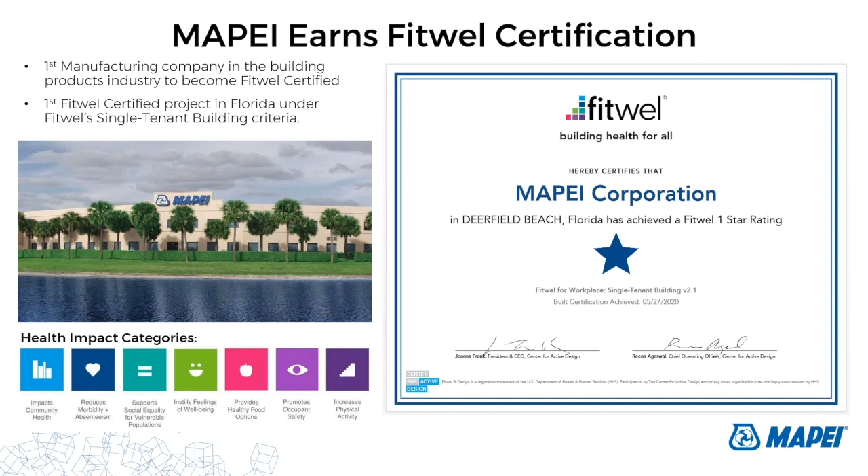MAPEI takes pride in being a leader in the industries we compete in. To continue to be a leader, we need to ensure that we understand the latest industry trends and keep our knowledge base current. We have LEED accredited professionals, or LEED APs, and WELL APs. Recently, a few members of the sustainability team completed a Healthier Materials and Sustainable Buildings course at Parsons School of Design, and we also have LEED and WELL faculty members on our sustainability team. Faculty members have to prove that they're credible, qualified instructors with deep sustainability expertise, so we get to present more technical information on LEED and WELL.

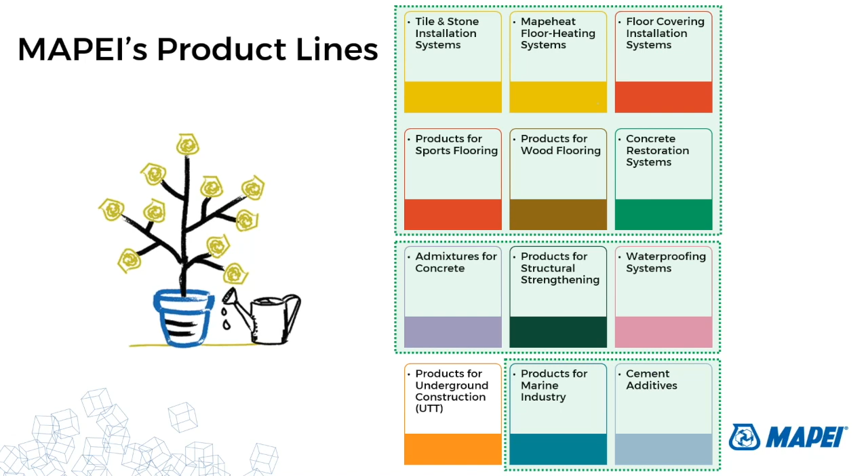The construction industry has a significant impact on the environment. The industry accounts for roughly 25 to 40% of the world's total carbon emissions. Mining projects extract minerals needed for construction materials. Companies then transport these materials to different parts of the world. And so both of these processes burn up fossil fuels, and the combustion of fossil fuels produces greenhouse gases.

One of the biggest environmental problems related to infrastructure development is energy use, and the global building sector consumes about 36% of the world's energy. So we need to act as an industry in watching what we're depleting in naturally needed resources. So we need to watch and be more careful in how we manufacture.

Other studies show that construction is responsible for 50% of landfill waste, as well as water, air, and noise pollution, as well as destruction of natural habitats.

As the effects of climate change and other environmental issues become more pronounced, it's more important than ever to find ways to protect the environment. Fortunately for the construction industry, the same changes will protect the environment from harmful impacts of construction and also improve the quality of construction products and boost profits.

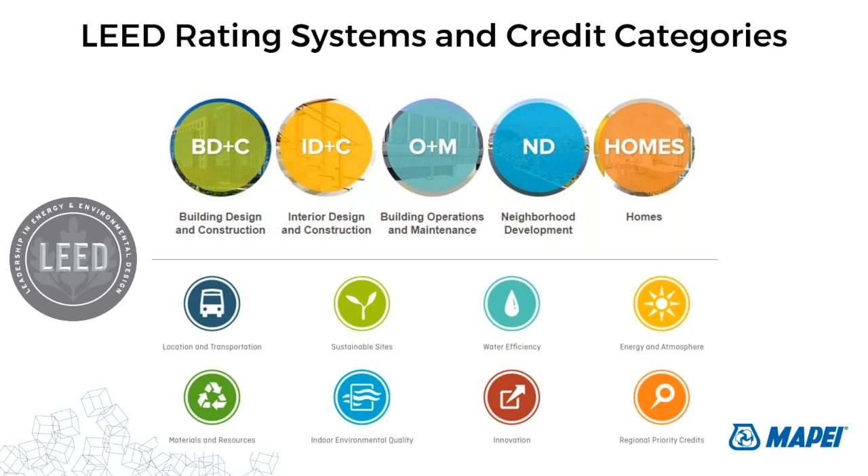There are currently 3 active versions of LEED. LEED versions 1 through 3 focused on using building products or materials with recycled content, low VOC content, and local sourcing. The newer versions, version 4 (V4) and version 4.1 (V4.1), focus on using products with environmental product declarations, health product declarations, and more stringent VOC emission requirements.

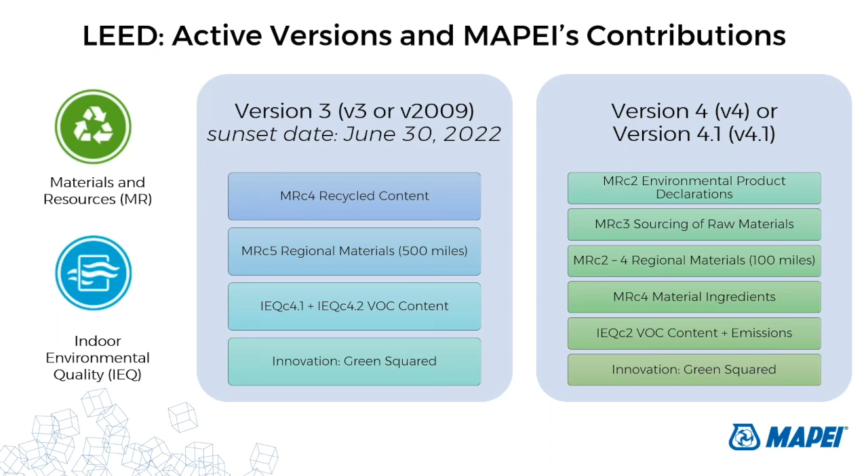ParkSmart. If you're not familiar with ParkSmart, LEED does not certify parking garages. If they're in your project scope, they're excluded from most credit categories. However, LEED came up with a rating system called ParkSmart, specific to the certification of parking garages.

Transportation in the US now emits more greenhouse gases than power plants. Worldwide, the number of motorized vehicles is expected to double by 2030, so enter ParkSmart. It's the world's only certification system designed to advance sustainable mobility through smarter parking structures, designs, and operations.

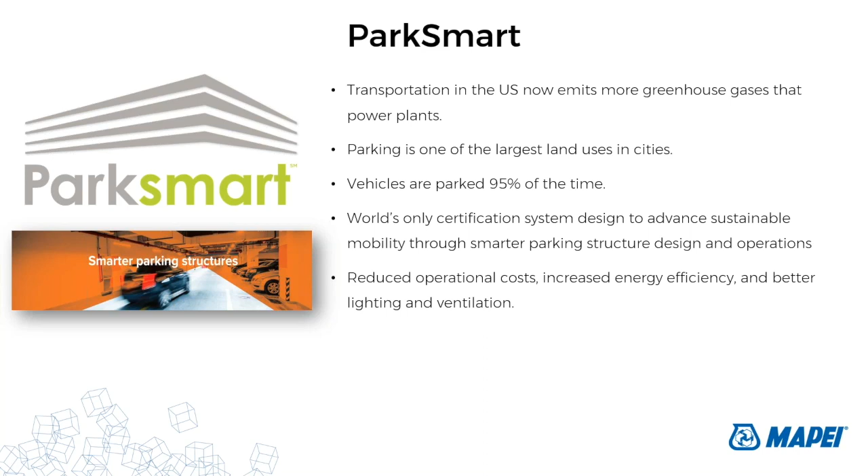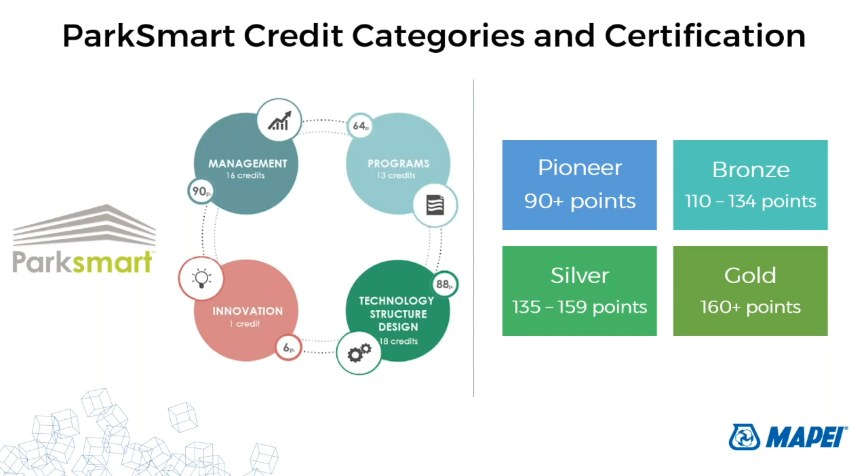MAPEI contributes to one of ParkSmart's credits, Measure C3. Instead of credit, they call it Measure C3, which is no or low VOC coatings, paints, and sealants. This ensures all paints, coatings, and sealants applied in the parking structure have little to no VOCs.

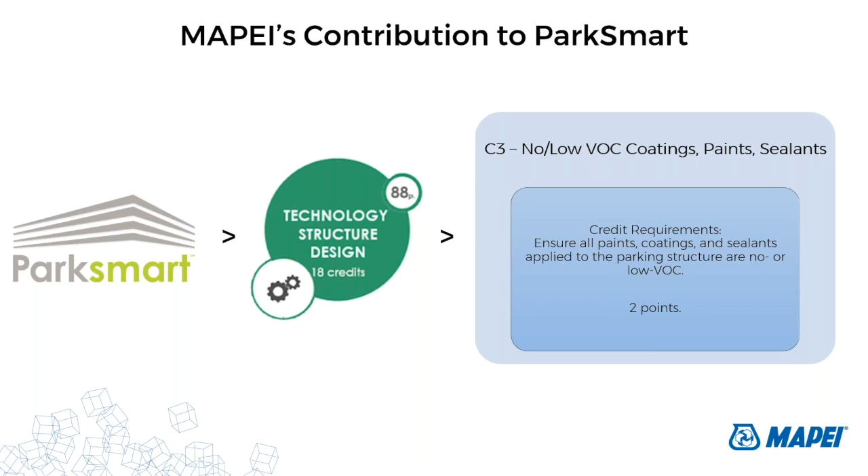Next, we'll talk about the Well Building Standard. If you're not familiar, it's the first of its kind - the first rating system to focus on the occupants of a space. It's developed by Delos and administered by the International Well Building Institute, or IWBI. It's also certified by the same certifying body as LEED.

So I always explain Well as picking up where LEED leaves off. LEED will look at a kitchen sink, for instance, and want to know how many gallons per minute that faucet is, how much water is coming out. Well looks at that same faucet and asks, what's the water quality? How is it going to impact human consumption? There are certain parameters that the project team has to meet. So they work together, LEED and Well.

Also, Well has a health safety rating. In response to COVID, the International Well Building Institute launched the Health Safety Rating System. It's a mouthful.

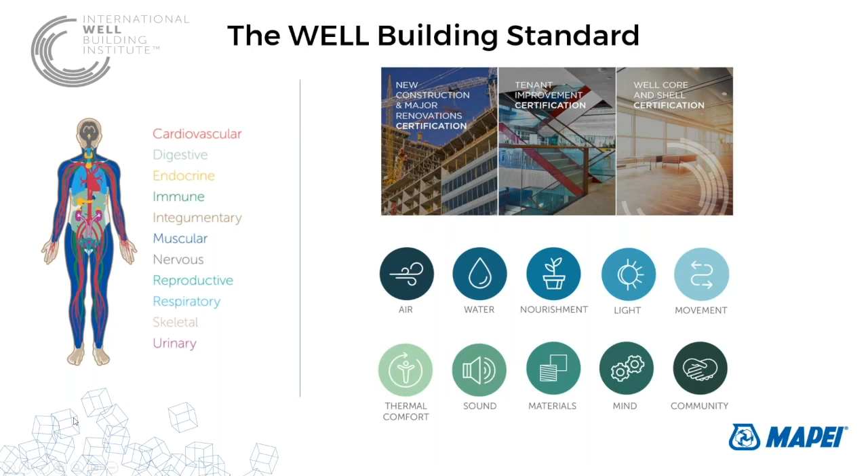Similar to LEED, the more points achieved, the higher the certification level. There are currently 2 active versions of Well. Currently, I don't believe there's any sunset date for Well version 1, unless it's come out recently and I haven't heard. Version 2 now includes the materials concept, which further adds to version 1, and now includes VOC and material transparency requirements that we'll talk about today.

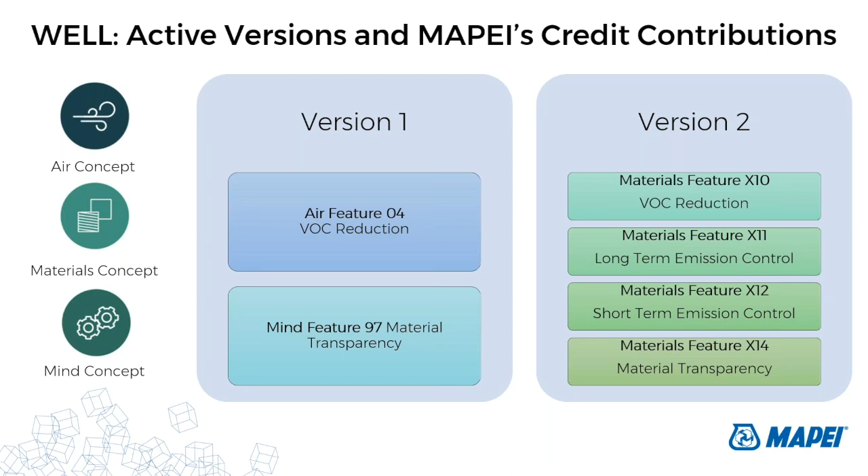The International Living Future Institute, or ILFI, is a nonprofit working to build an ecological-minded, restorative world for all people. Using principles of social and environmental justice, ILFI seeks to counter climate change by pushing for urban environments free of fossil fuels. ILFI runs the Living Building Challenge, the most rigorous green building standard, not to mention several other programs like the Living Product Challenge, the Living Community Challenge, and the Reveal, Declare, and Just labels.

These programs develop a green framework for living in a 21st century world. The Living Community Challenge creates a new era for community building and a new version of urban design. It's a certification that scales up innovations made by Living Building and Living Product Challenge products, and envisions cities and regions as living entities.

There are other programs like Core Green Building Certification, a framework that outlines 10 practices that a building must achieve in order to be considered sustainable. The Declare label we'll talk about a little later, and Just, which like Declare, is a transparency platform and disclosure tool. Just allows organizations the opportunity to publicly document and quantify their commitment to social equity in the workplace.

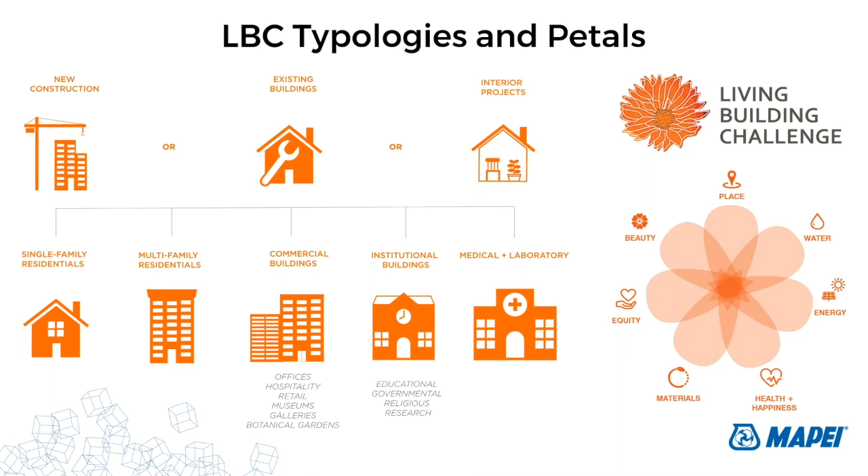There are 4 typologies: new building, existing building, interior, and landscape or infrastructure, which is not shown here. Living Building Challenge consists of 7 performance categories or petals: place, water, energy, health and happiness, materials, equity, and beauty.

So based on the petals pursued and their requirements, project teams can achieve various Living Future certifications. Living Building Challenge, or LBC, is the most difficult, or the most rigorous standard for green buildings. I refer to LBC, or Living Building Challenge, as LEED on steroids. It goes above and beyond LEED certification, as Living Building also strives for net zero or net positive energy.

They also request freedom from toxic chemicals and lower energy footprints than a typical structure. LEED is catching up to the requirements asked of Living Building Challenge. There's a lot of similarities between the two, so the idea of LBC being LEED on steroids is quickly going away.

Living Building Challenge is not a competition. It takes its name from its level of rigor and does not include any sort of contest, even though it's called a challenge. To be certified under Living Building Challenge, projects must meet a series of ambitious performance requirements over a minimum of 12 months of continuous occupancy. There are several types of certification, like core green building certification, petal certification, zero energy, and zero carbon certifications.

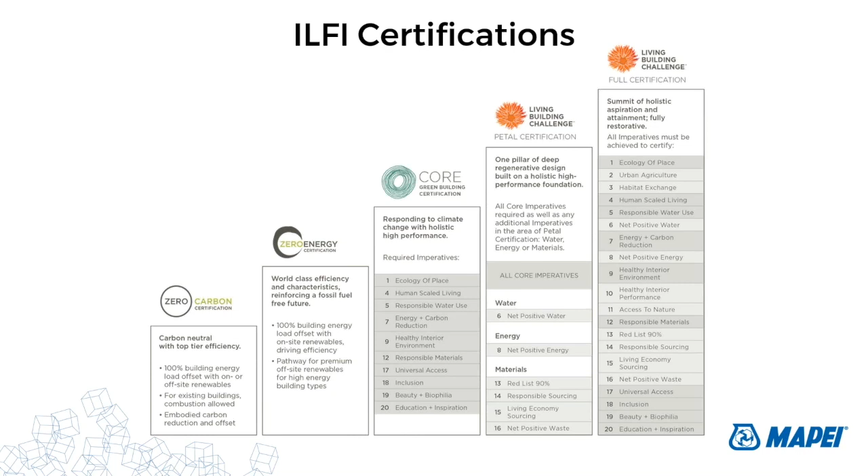There are currently 2 active versions of Living Building Challenge. As you can see, the credits remain the same, however the requirements become more stringent as the versions develop.

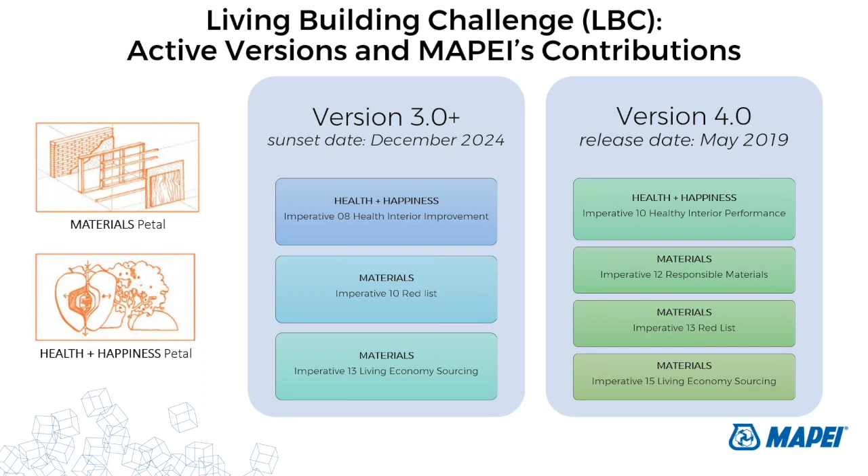So juggling multiple rating systems and their requirements and multiple material lists, it's important to note what works for one system may not work for another. As more and more manufacturers get on board with the newest green building programs and the latest versions, it's unlikely you will run into this issue.

However, there are times when a product will work for version 3, but it will not work for version 4, or it will not work for WELL or Living Building Challenge. It's also not uncommon to have LEED and Fitwel buildings, or LEED and ParkSmart, or LEED and Living Building Challenge. The sky's the limit on what the project team decides to pursue. This will make more sense in the next section when we talk about green product certifications.

So using LEED Green Building Certification as an example, it's also important to note building projects receive LEED certification based on the number of points achieved, and we talked about this earlier. To get 40 points is the minimum required for LEED certification, and then silver, gold, and platinum have additional points required. Products cannot be LEED certified.

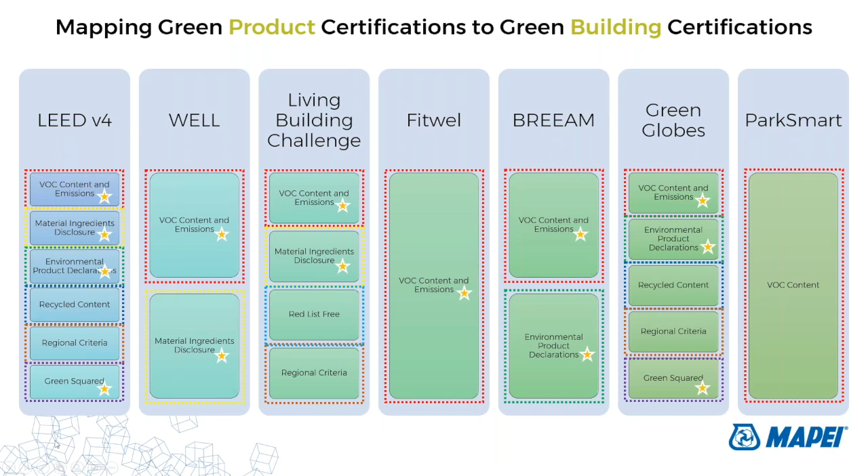In summary of the last slide, for flooring materials, this is what green building certifications are asking manufacturers and project teams to provide for each project or each product. Will every product have all of these? No, and that's okay, but we're going to break down each of these in the next section.

There are attributes or certifications that focus on reducing impacts on human health and well-being. There are attributes or certifications that focus on minimizing embodied energy and other impacts associated with extraction, processing, transportation, maintenance, and disposal of building materials. And there are some attributes or certifications that focus on health and environmental impacts.

Green building programs have instigated market transformation of building products by creating a cycle of consumer demand and industry delivery of environmentally preferable products. Project teams pursuing a green building program created demand for increasingly sustainable products, and suppliers, designers, and manufacturers are responding. Projects are awarded for using products that meet specific criteria. Again, in a perfect world, every product would have these certifications or attributes. Realistically, that might not be possible, but that's okay.

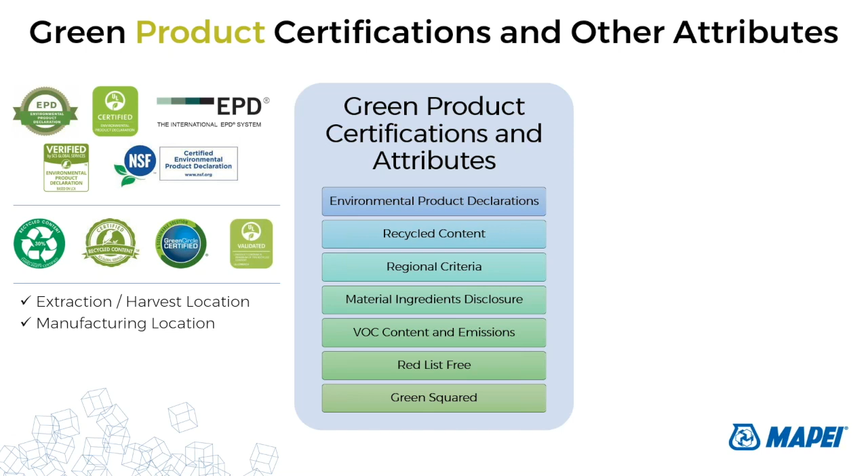To meet regional criteria, manufacturers have to provide extraction and manufacturing locations. Again, this attribute also does not have to be third-party verified. A manufacturer can share this with the project team if applicable. There's also material ingredient reporting. It's typically third-party verified but not required. Like EPDs, there's no specific third-party verifier or type of report that has to be used. It's up to the manufacturer.

VOC emissions testing is third-party verified. Again, the manufacturer chooses. Green squared certification - there are at least 2 ways to get third-party certification. And then red list is another attribute that can be third-party verified. So there's a lot of green product certifications that a single product can have.

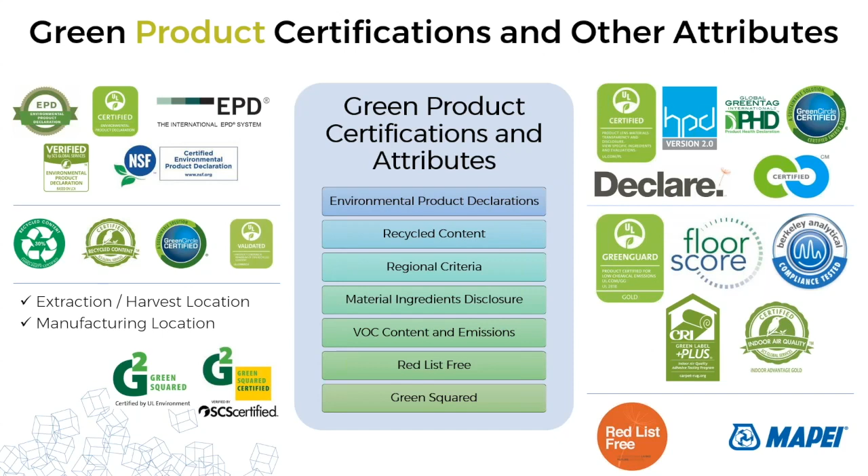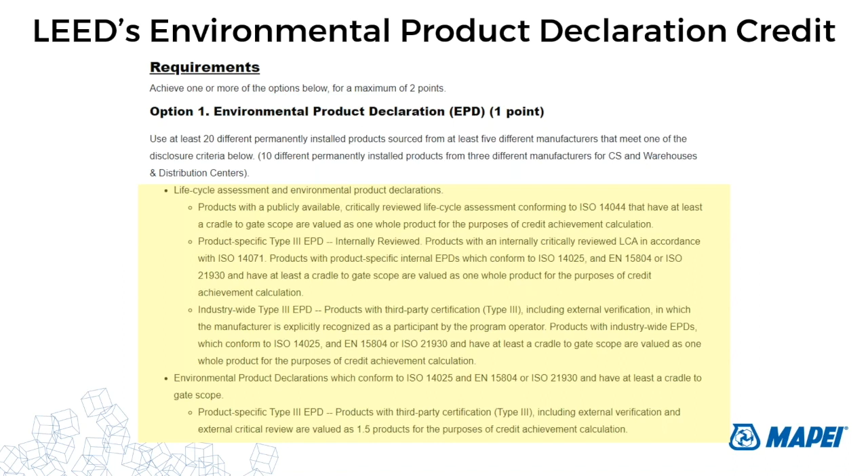So here's LEED language on EPD requirements. It's a lot of information - I pulled it from the LEED reference guide. Manufacturers - this is what I'm summarizing from what's highlighted below - have a few options to comply with this highlighted language. It just gives you 4 options for achieving this credit, and it's up to the manufacturer to determine if they want to go after it, how they want to go after it, and what type of EPD that they're going to provide.

In order to achieve this credit, I first have to start with having a life cycle assessment, or LCA, of a product. LCA is a compilation and evaluation of the inputs and outputs and potential environmental impacts a product system can have throughout its life cycle. The entire life cycle of a product is examined for this process. Its processes, the components are identified, and then the environmental effects are assessed - both upstream from the point of manufacture or raw material extraction, and downstream, including transportation, use, maintenance, and end of life. This approach is sometimes called cradle to grave.

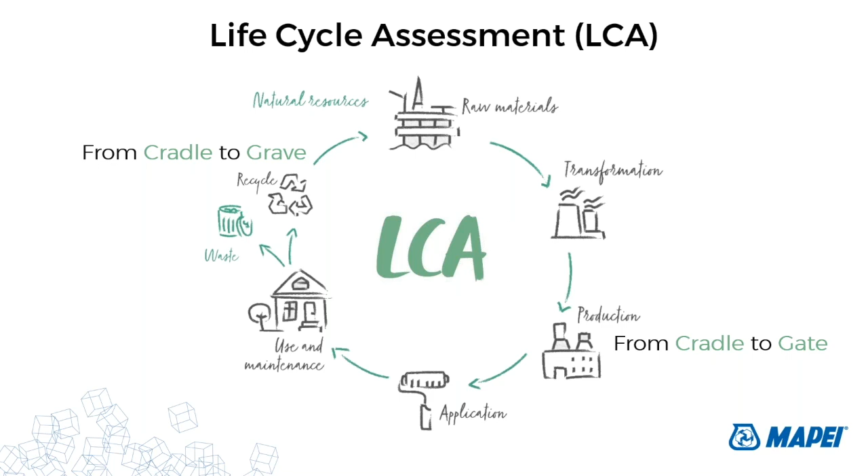An EPD, or Environmental Product Declaration, is a document which transparently communicates the environmental performance or impact of any product or material over its lifetime. Within the construction industry, EPDs support carbon emission reduction by making it possible to compare the impacts of different materials and products in order to select the most sustainable option. Architects, engineers, and designers are able to choose the most sustainable option for their project. Manufacturers are able to optimize the impact of their products and market their carbon transparency. So these are the steps that it takes for us to create an EPD.

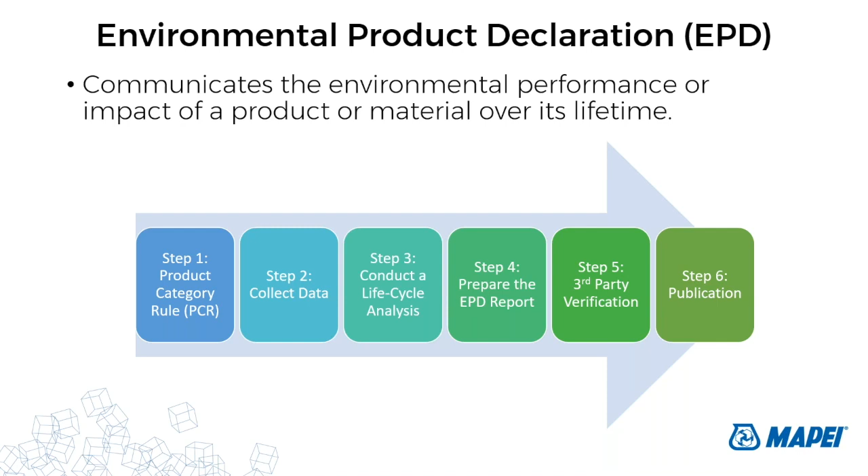And all of the information from the life cycle analysis is plugged in. The data collected includes energy use, water use, waste, and emissions, and all of that information is measured for potential environmental impacts such as climate change, acidification, smog formation, eutrophication, etc.

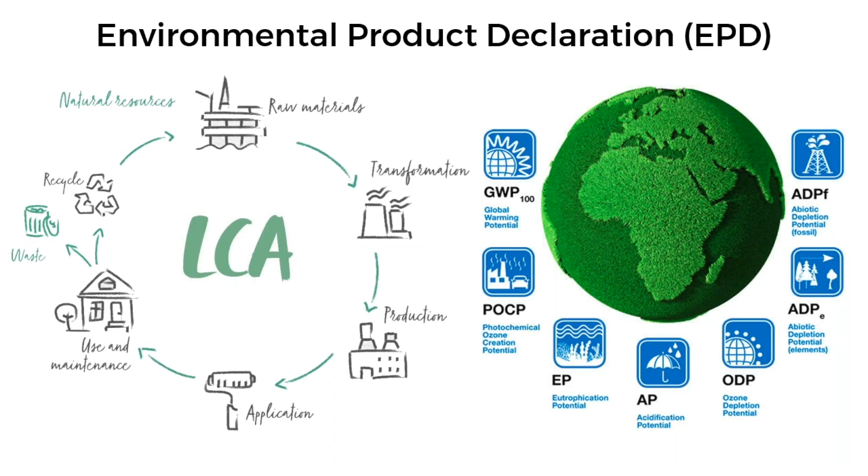And all of that is prepared into an environmental product declaration report. Having an EPD does not imply that the declared product is environmentally superior to its alternatives. Pursuing an EPD is, again, voluntary.

These are two types of examples of EPDs. There are several types, but the two we'll talk about today are industry-wide EPDs. It's a generic declaration that covers the average product across many manufacturers. So while these EPDs are third-party verified, they do not cover an individual product since they account for the average product in a group.

So the middle image is the cover of an industry-wide EPD. It's for products manufactured in North America, specifically cement mortars for tile installation, and you can see all of the manufacturers that have participated in providing data to create this environmental product declaration.

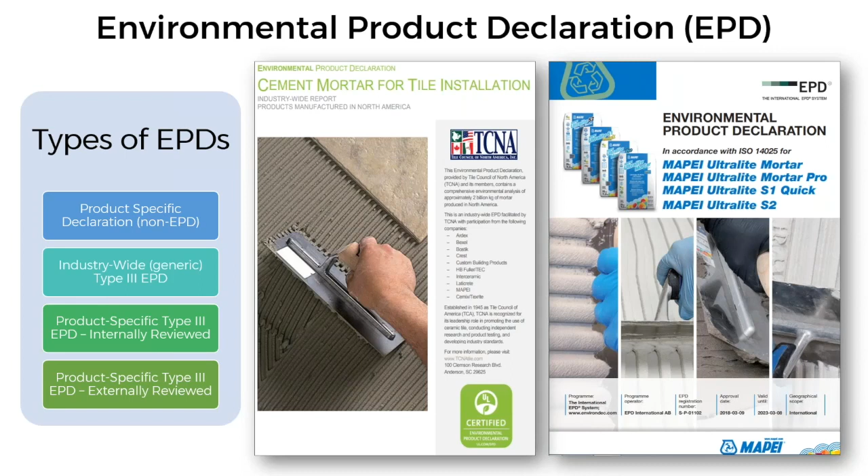There's also product-specific EPDs, and you can see the example on the right. It's a product specific to MAPEI, or products specific to MAPEI, that have gone through third-party verification of our life cycle analysis.

This is the next credit within LEED that our products can contribute to. It's called sourcing of raw materials. Manufacturers have a few options for achieving this credit. Some have to do with extended producer responsibility, which is talking about take-back programs, which is not applicable to MAPEI or our industry. Wood products, material reuse, but the one I've highlighted here is recycled content, which probably many are familiar with.

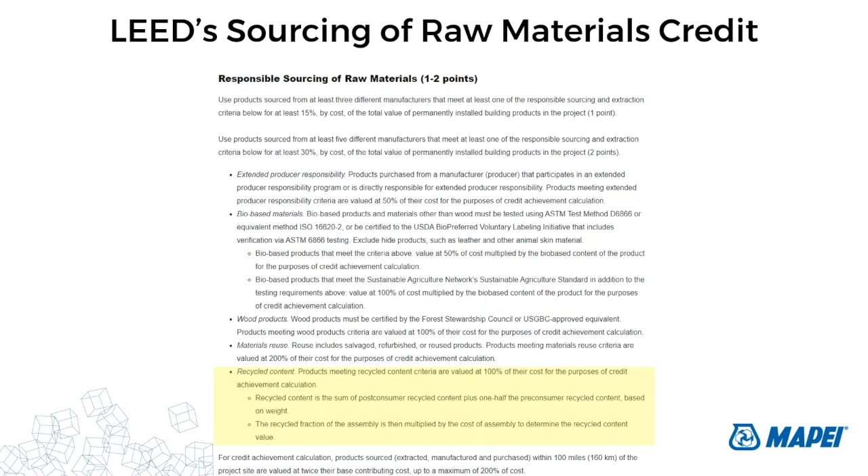Project teams can achieve points for selecting products verified to have been extracted or sourced in a responsible manner. Using products with recycled content results in lower environmental impacts compared to using raw materials. Recycled content is a portion of materials used in a product that have been diverted from the solid waste stream.

Pre-consumer, post-consumer, post-industrial, and recycled are terms used in materials, but mean different things. If a product is diverted during the manufacturing process, it's referred to as pre-consumer or post-industrial. Post-consumer refers to materials that are diverted after consumer use that would otherwise be discarded as waste. Post-consumer is generally viewed as offering greater environmental benefit than pre-consumer.

However, pre-consumer waste is much more vast. It's more likely to be diverted from a waste stream. Post-consumer is more likely to be mixed with other materials and sent to the landfill, making recovery more difficult.

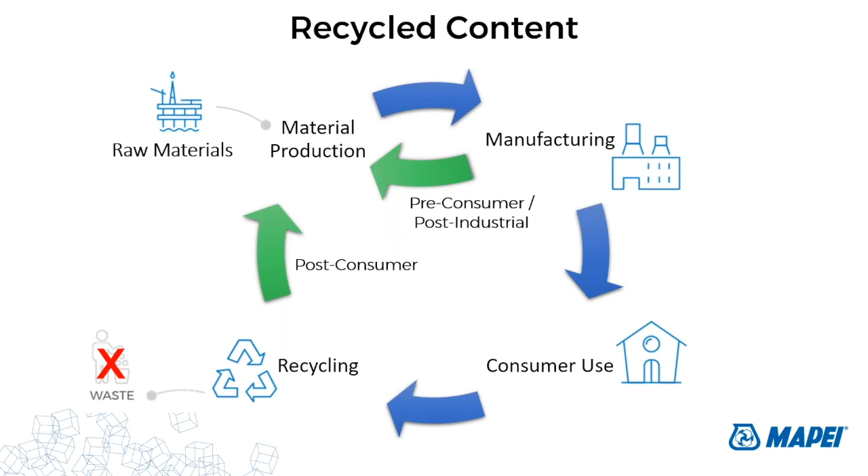To claim pre-consumer recycled content, a manufacturer would have to be able to substantiate that the material it's using would have become garbage otherwise. Post-consumer doesn't always refer to the average individual consumer - the consumer may be the manufacturer. And this is just an example of recycled content certification.

Recycled content has many significant environmental advantages, including reducing impacts resulting from extraction and processing of virgin materials. This is an example of MAPEI's Mapesonic RM. Our Mapesonic RM product is a line of sound reducing products that utilize post-consumer content.

These underlayments are made up of 83% post-consumer recycled content. For every 100,000 square feet of Mapesonic RM installed, approximately 1,400 tires are diverted from the landfill.

Some manufacturers seek third-party verification, but it's not typical. I think in this case, we went after certification because it's such a significant percentage of post-consumer content that we wanted to avoid greenwashing and have it third-party verified. Most manufacturers can either provide a certification like this or simply provide a letter stating the post and pre-consumer percentages.

Regional materials, again, this is probably one of the more familiar sustainable attributes. Many products travel significant distances before arriving at project sites. The impacts associated with transportation can be significant, including increased gas emissions. So it's important to select locally sourced products where you can, to support the use of indigenous resources and the local economy.

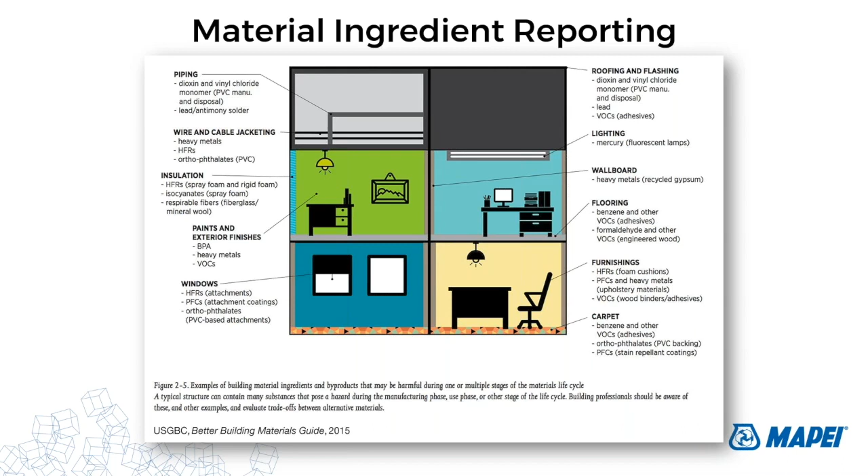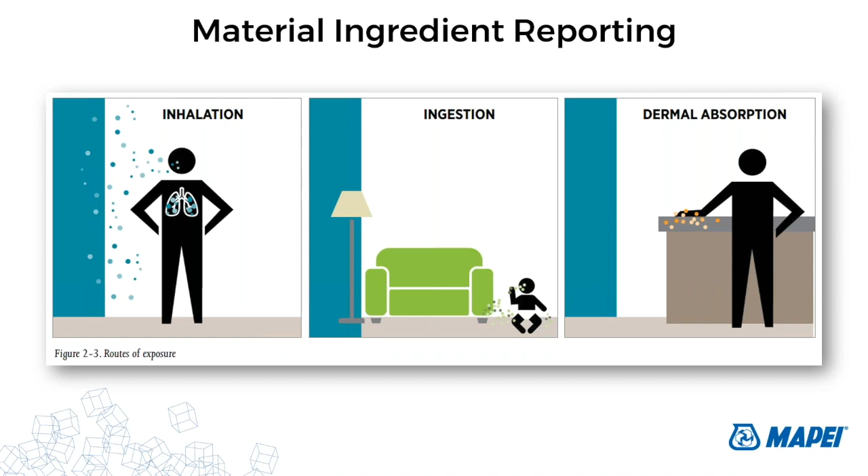In addition to meeting criteria that reduces impacts on the environment, products used in the built environment should meet specific criteria for health and safety for occupants. When talking to sustainability-minded people, they use the word transparency a lot. It means they want to know what's going into your products. And there are many different ways of ingesting or inhaling or dermal absorption of materials and overall exposure. So the reason for transparency is we demand to know what's in our foods. Why not demand to know what's in our building products?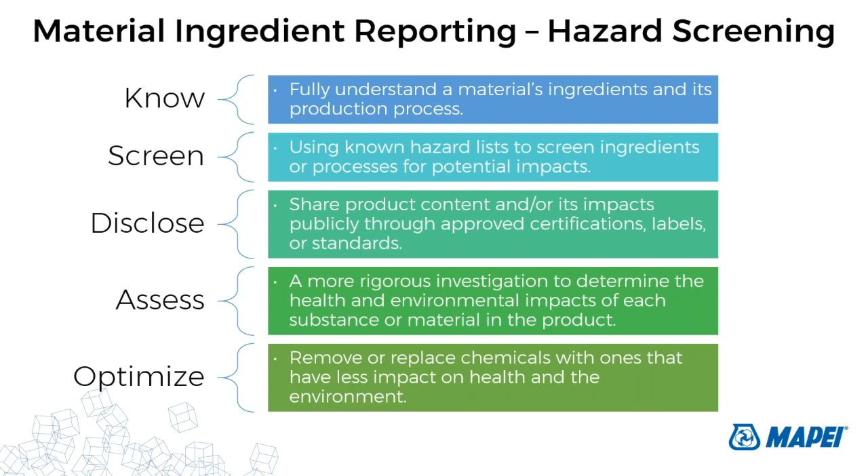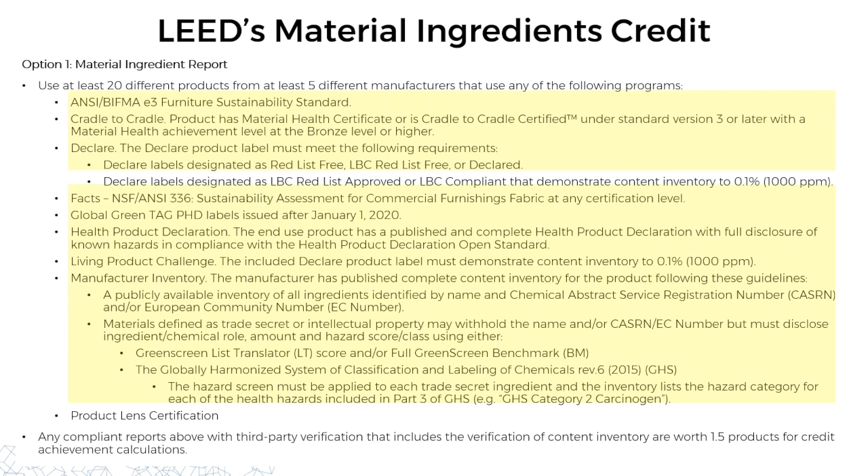This is LEED version 4 and 4.1's information on how they ask manufacturers to disclose material ingredients. I know it's a lot of content. Most are familiar with HPDs. In fact, that's what we get the most requests for, are HPDs. I'm here to tell you there are more than HPDs. There are other forms of material ingredient reports, as they're bulleted here.

And all of that on the last slide is summarized here. These are the different types of material ingredient reports, or certifications, that are available. Material ingredient reports are a form of disclosure. They don't necessarily mean a product is more healthy than another. It's just a report that discloses ingredients. It infers it passed a specific set of material ingredient reporting standards.

Ingredients were identified and screened. There are no regulations that require manufacturers to disclose this information. It's simply done because manufacturers like MAPEI think it's the right thing to do.

This is a transparency document that shows the ingredients in a product and their associated hazards. While third-party verification is optional, MAPEI's MIs are third-party assessed and verified by GreenCircle Certified. This holds us accountable and avoids greenwashing. A bonus for customers is that these third-party verified material ingredient reports are worth 1.5 products on LEED projects. And I'd be happy to explain that more to project teams if you're interested.

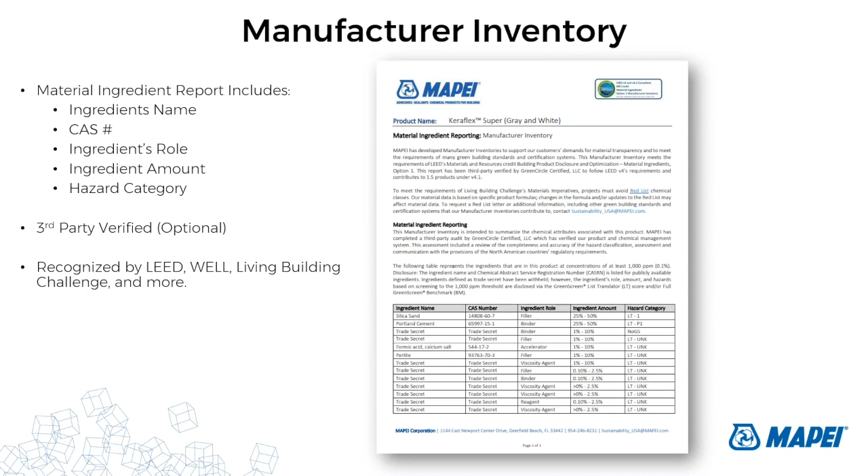GreenCircle Certified is a third-party certifier for these reports, as I mentioned. While it's a lesser known material ingredient report, the manufacturer inventory is a compliant pathway for projects pursuing LEED, Living Building Challenge, and the Well Building Standard, and many more.

Manufacturers can also screen ingredients against a very targeted list of chemicals, often such as the red list. You've heard of, or you may have requested, a red list check, which means that the product is screened to confirm it does or does not contain any substances on this list. A red list compliant product is one that contains a red list material or chemical, but is compliant through temporary exemption granted by the International Living Future Institute. It's usually due to market conditions that make the chemical difficult to remove from the list.

Red list free product means that no red list ingredients are present in the product. It's considered partial optimization, as it avoids, I believe, 800 different chemical hazards, but products may still contain hazards that are not included in the red list. There's also priority for red list inclusion and watch list, which again deal with ensuring that chemicals are designated where they need to be, or being watched as potentially red list in the near future.

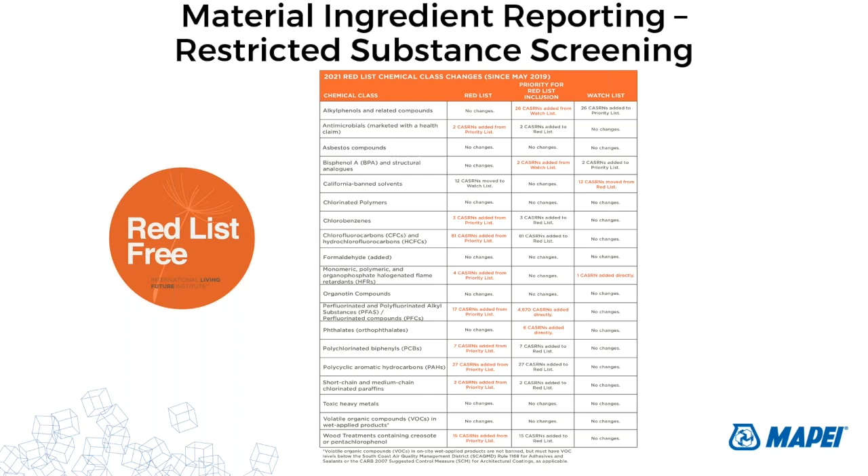Perkins and Will has also something pretty similar. They have a precautionary list. They've compiled the most problematic substances that people encounter in the built environment and allow design professionals to search for key substances and chemicals of concern using filters like project type, product type, and health and environmental impacts.

Next, we'll talk about indoor air quality, or indoor environmental quality. Building materials are called out as one of the most common sources of indoor air contaminants.

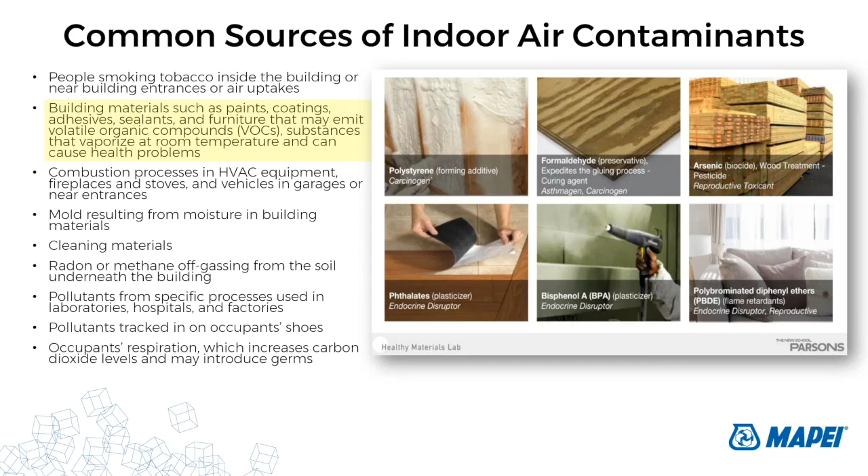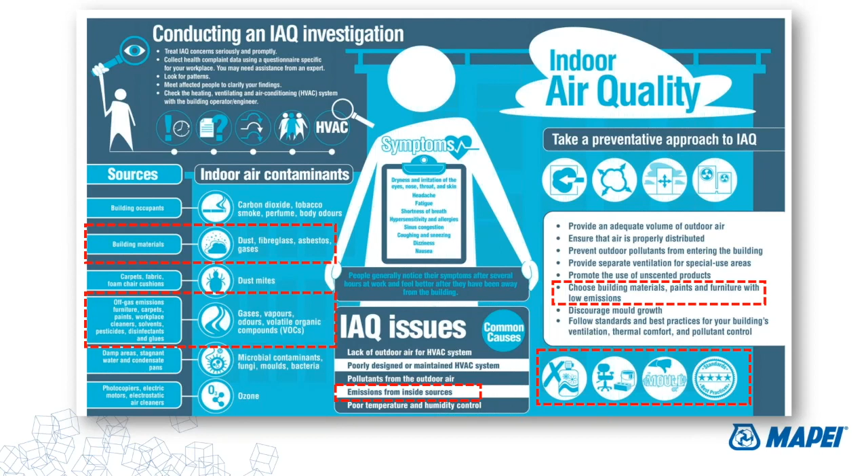The source of indoor air contaminants we just saw includes building materials, and it can cause short-term and long-term health effects. Many finishes must be installed using adhesives, sealants, and other architectural coatings that emit or off-gas VOCs during and after installation. Some VOCs are odorous, irritating, or toxic to human health, so it's important to select products with low VOC content and emissions.

What are VOCs, or volatile organic compounds? It's a carbon compound that can vaporize or become a gas at normal room temperatures and tends to evaporate from building products into the air over time, where humans breathe them in.

Why are they a problem? Outdoors, many VOCs participate in atmospheric photochemical reactions, making smog. Outdoor sources of VOCs include gasoline, diesel emissions, and wood burning. But indoors, many have direct health impacts.

Associated with this is short-term sick building syndrome. There are a lot of common organic pollutants that are considered 2 to 5 times higher inside than they would be outside.

Indoor products that contain VOCs include paints, adhesives, wood preservatives, air fresheners, pesticides, and aerosol sprays. There are so many different ways that you can breathe in VOCs.

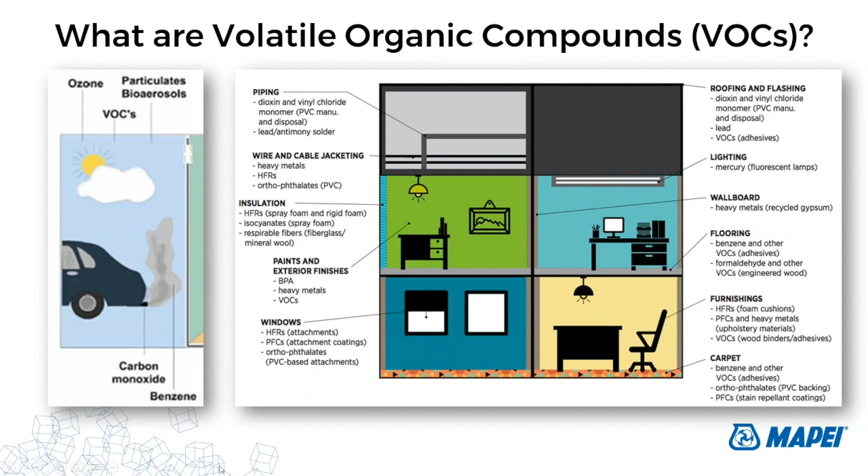The rating system breaks down what they mean by emissions and what they mean by content. Emissions must meet California Department of Public Health, CDPH, version 1.1 or higher, depending on the version of LEED you're pursuing. It must also meet South Coast Air Quality Management District, SCAQMD, Rule 1113 or 1168, depending on what product type you have.

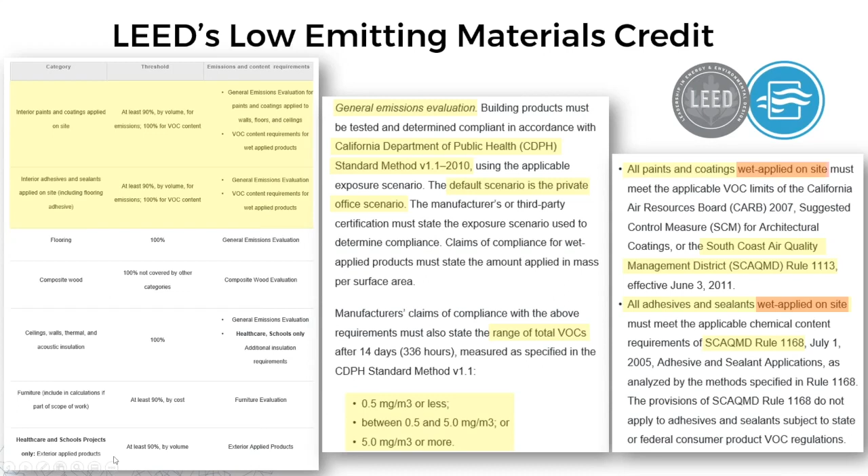Again, we're keeping things specific to floor setting materials here. So every flooring adhesive, sealant, coating, underlayment, etc. has to provide VOC content and VOC emissions certification showing compliance with CDPH. So in one way, shape, or form, all of those green building standards are asking for the same thing.

Some green building programs are stricter than others, requiring 100% of products to comply, while others only require 75% to comply. But if you read between the lines, they're all asking for the same thing.

VOC content and VOC emissions - what is the difference between the two? Content is as simple as it sounds. It's the content of VOCs in a product, or the amount of VOCs present in a product.

There are regulations in place for VOC content through the South Coast Air Quality Management District. They have the most stringent VOC regulations in the US, with rules that dictate VOC content for paints and coatings, including floor coatings, adhesives, and sealants.

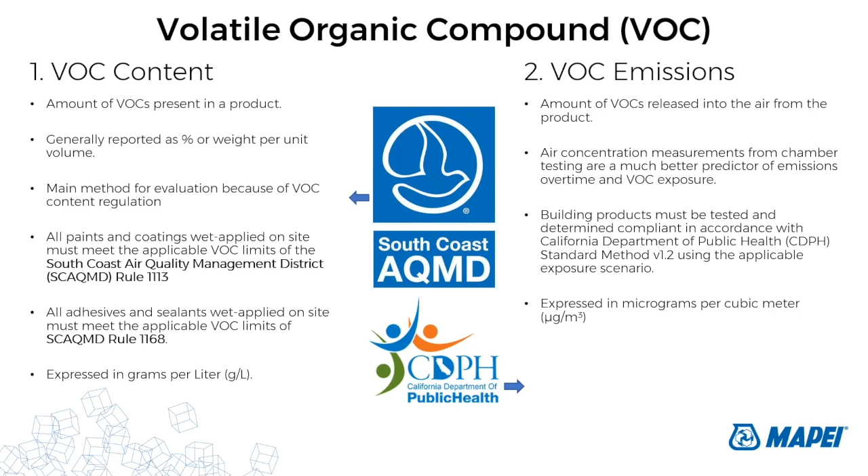This is a breakdown of South Coast Air Quality Management District Rule 1113 and 1168. They specify max VOC content for various adhesives, sealants, paints, and coatings. For wood flooring adhesives, for example, project teams should find wood flooring adhesive with VOC content less than 100 grams per liter.

And for floor coatings, in this case, also under 100 grams per liter. For coatings such as concrete floors, you want VOC content to be less than 100 grams per liter.

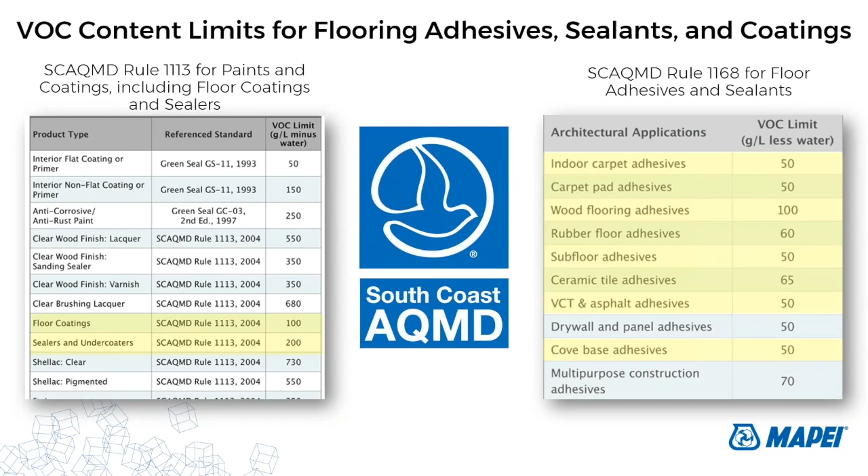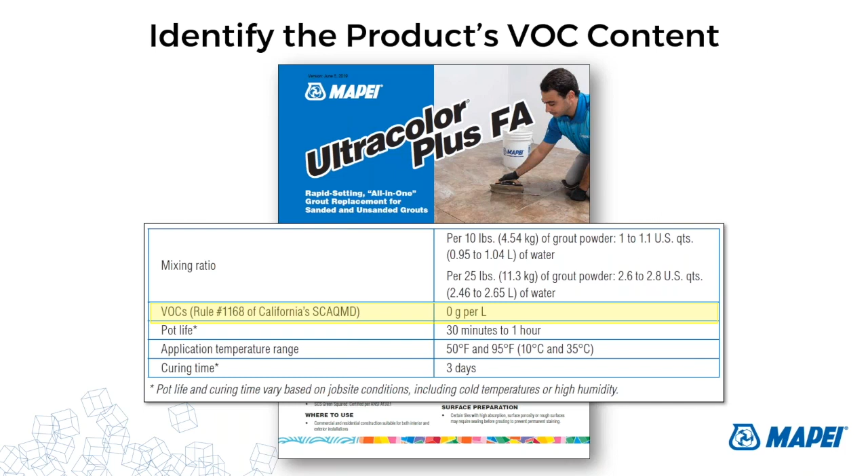It's very difficult to find products nowadays that don't meet South Coast Air Quality Management. That information is typically available on a technical data sheet, a safety data sheet, or other product information. VOC limits are again expressed in grams per liter. Product VOC content is found on our technical data sheets, or TDS.

As I mentioned, VOCs are newer to green building standards, and still very new to manufacturers as well. It's still pretty difficult to come by in most cases, and it does require third-party testing and certification. There are many programs out there, but these four are the most popular.

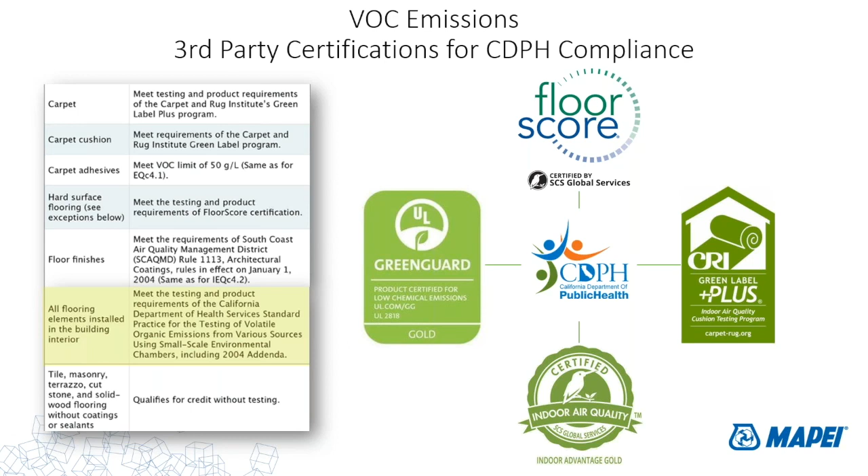And this is an example of a VOC emissions certification.

MAPEI's R&D efforts are directed to develop sustainable and environmentally friendly products with low VOC content as well as low VOC emissions. These products contribute to air quality in our homes, safeguarding the health of both installers and end users. Our labs are equipped with VOC emissions test chambers. However, to avoid greenwashing, we do go through third-party certification.

And lastly, Green Squared certification. This is a multi-attribute standard, a certification that looks at environmental, social, and health impacts. It's drafted by Tile Council of North America's Green Initiative Committee and submitted to ANSI for further development and finalization of the certification. ANSI A138.1 for Green Squared is

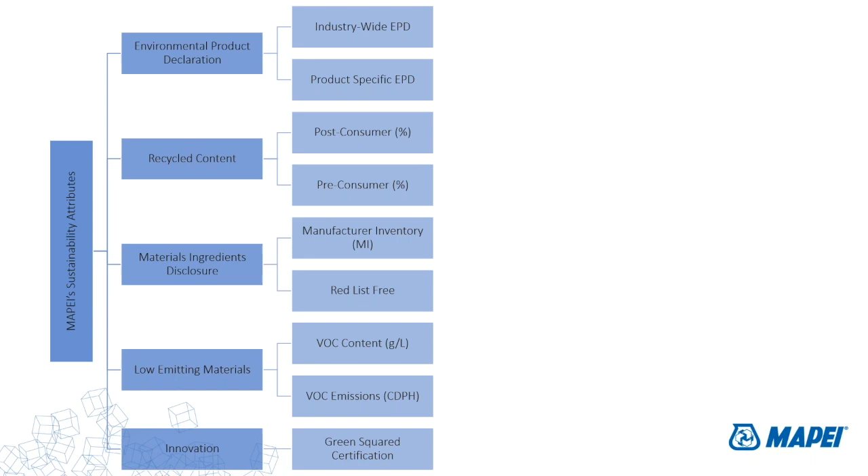So in a nutshell, this is what's being asked of manufacturers. In a perfect world, a MAPEI product would have all of these sustainable attributes or certifications. These vary from what may be required from concrete, or drywall, or wood flooring. These again are specific to what's being asked of MAPEI.

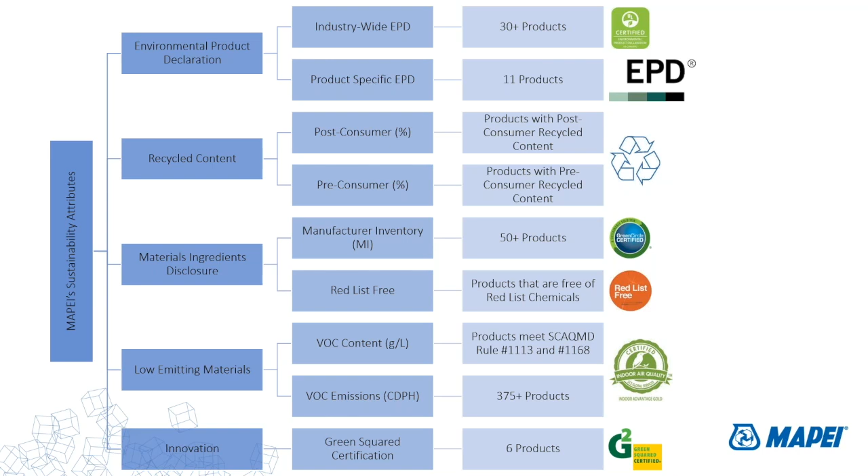And we meet the following sustainable attributes or certifications, and in most cases can provide or meet the perfect world scenario depending on the product line or product type that projects are looking for.

So how do you pick a healthy and sustainable material, or where do you find them? There's a myriad of disclosures and certifications and lists and standards and labels in the building industry, so it can be very difficult to figure out what you're looking for, what you need. On top of that, sustainability means different things to different people.

Selecting products with sustainable attributes requires research and critical evaluation. There's a wealth of sustainable information available and continuing to be developed pertaining to green products. The key is to start with the green building certification system being pursued, after which the project team should educate themselves on sustainable attributes needed to meet certification system goals and find products that meet those requirements.

So ask the project team questions. Will this project be pursuing green building certification? What credits is the project pursuing? Are there specifications specific to sustainability? Review specifications - if it is pursuing sustainability, there's typically, or hopefully,

01-8113 sustainable design requirements, which will notify you as to which green building certification the project is pursuing. Your spec, your spec section - so in this particular example, 09-3000, it further details the attributes or certifications that are specific to that division, or that CSI section. Will every product meet these specifications?

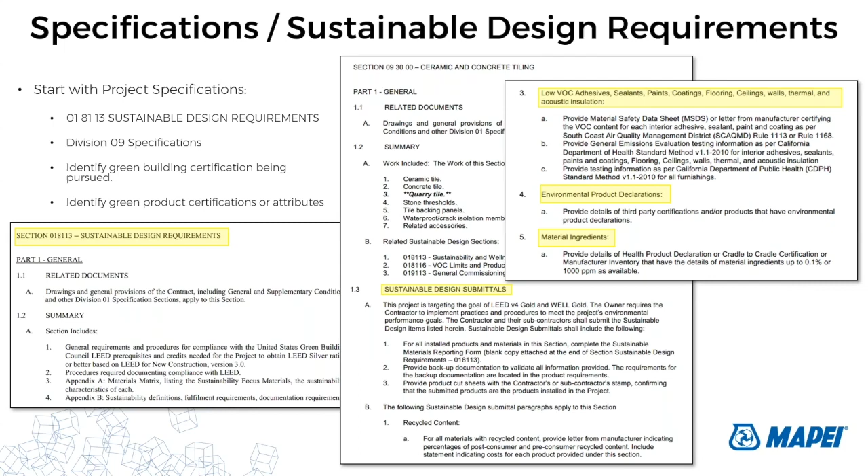Probably not. It's best to work with the project team and the manufacturer to find the best product or products for your project, or work with them to find alternatives.

Also, ask MAPEI. I encourage project teams to reach out and ask questions about our products. You can visit our website. Under the About Us section, we have a Health and the Environment section for general information on our commitment to sustainability and information about the attributes or certifications that we talked about today.

Under the Tools and Download section, our product information library has a filtering option. I like to search by sustainability product reports for all of the product's sustainable attributes rather than each type. And then under each product and solutions section, or each applicable product page, we'll have product reports or other sustainable attributes or certifications for download, which looks like this.

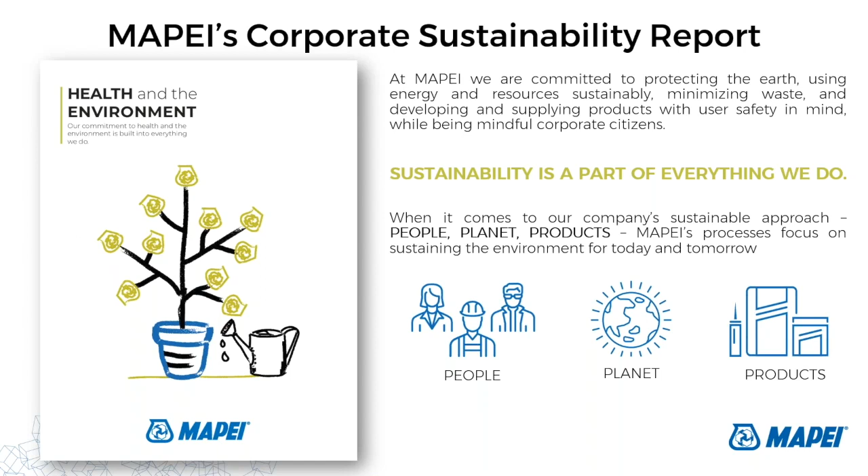Also, our corporate sustainability report that I mentioned at the beginning, there's in-depth information on our commitment to sustainability. They talk about the people section, which covers our involvement with green building industries. Planet section details our initiatives, and products detail our sustainable attributes or certifications that we talked about today. There's also a section on how to read our sustainability product reports.

And I mentioned here Mindful Materials. Mindful Materials, if you're not familiar, is a free platform with aggregated information on human health and environmental impacts for products. Project teams can essentially select building products by filtering through various options, including general material categories such as adhesives or grouts. There's also by CSI division, manufacturer, certification standards, green building program, etc. We have over 375 products on the Mindful Materials site, and we do keep this up to date as much as we keep our website up to date.

There are other platforms similar to Mindful Materials, such as UL Spot, Ecomedes, Better Materials, etc.